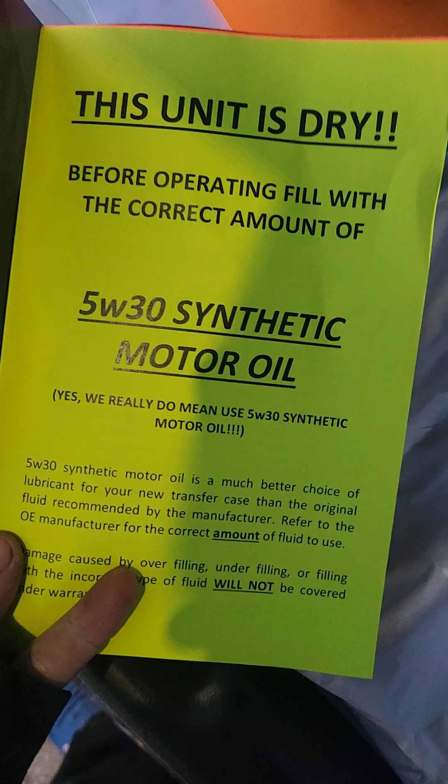This is what caught me off guard. It's probably some specialty things, but I will definitely respect the remarks of that. Brand new rebuilt unit, I don't know how many miles are on it, but I have a brand new gasket for it, so I'm pretty excited there. But that's really all I got to say about that.

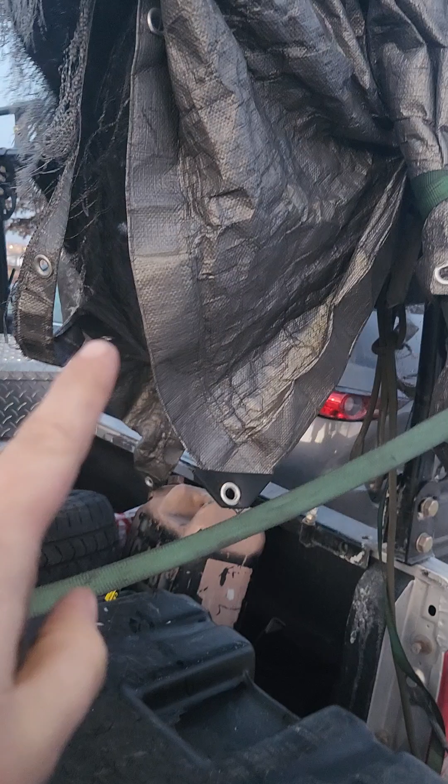As for the mini bike, well she's certainly seen better days, currently rotting away. Currently working on getting the new tires for it sorted, which I have gotten moderately done up. I also picked up a power drill because I know all the gas and any remaining gas in this thing is no good. So I'm gonna go get that situated real quick, and I'll take you upstairs.

Anyways, we're back up to my room right now, and this is what I currently have as of right now. Apologies, I'm a little out of breath right now.

So if you can't tell just by this alone, this is not one of the original rims for this bike. Here are my two. The reason why is, turns out that modding one of these spokes, put it simply, they're the wrong size. So this is going to be my front tire for the time being, which I will just slap a brake disc on it and call it a day.

However, I now have the new project to figure out, which is this one. This will be the powered one, which I was able to retain the original spokes, the original wheel. I currently have a set of titanium spokes that I got from JR Bicycles, which I have stuffed in my Reese Racing sprocket right here that I also can't use because I bought the wrong one.

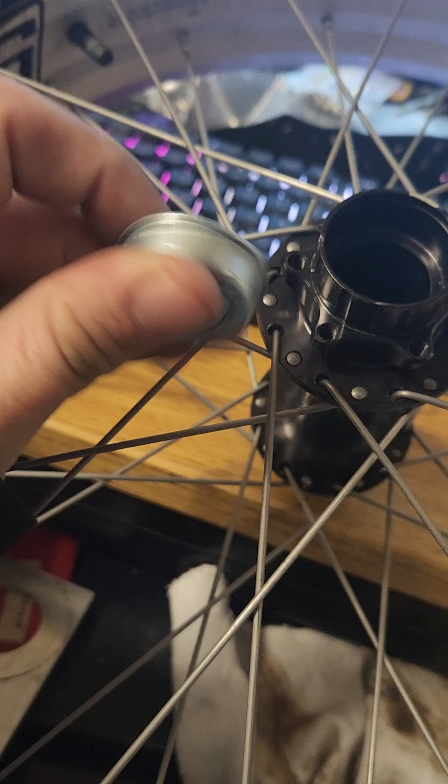I currently have the bearings removed on it because, well, I bought the wrong ones unfortunately, as these measured but they're a little too loosely fitting, albeit the other reason is they don't fit the freaking axle, because I'm going to try and reuse that axle so I'm not having to spend a couple bucks. But it is a pretty loose fit, so I might be able to get away with running a shim, a slightly oversized shim, or just get a length of pipe that is slightly bigger and jam it in there, then throw some bolts and washers to make sure the thing keeps its spacing.

But as of right now, I currently also have, that is a mouthful, a part currently being fabbed up by a company called, I don't know how you exactly pronounce it, I think it's like Xometry or something. Let me just double check real quick.

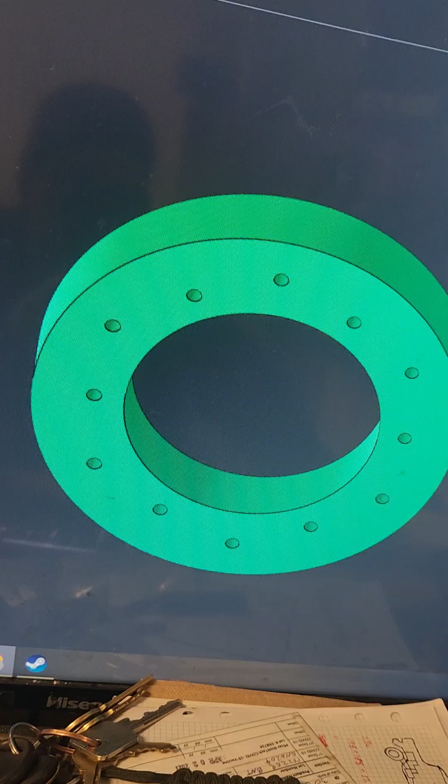Let me take a quick pause real quick. That is the part I'm currently making right now. This is essentially a hub adapter that I'm currently making. I'm currently using Text to CAD to kind of visualize my idea, but to put it into perspective, this is what I have on paper that I've made.

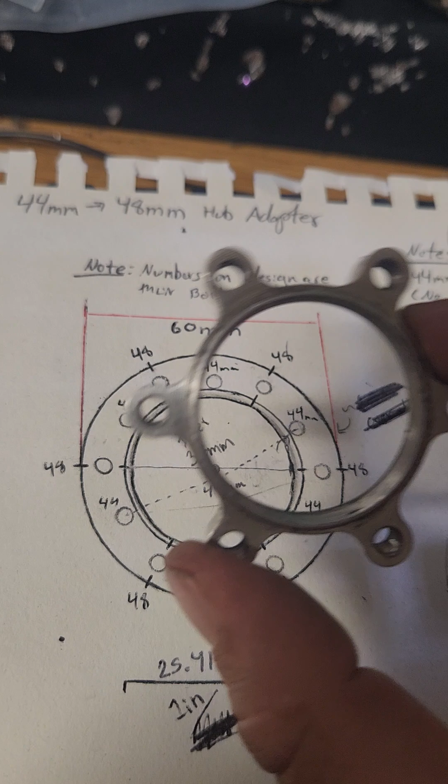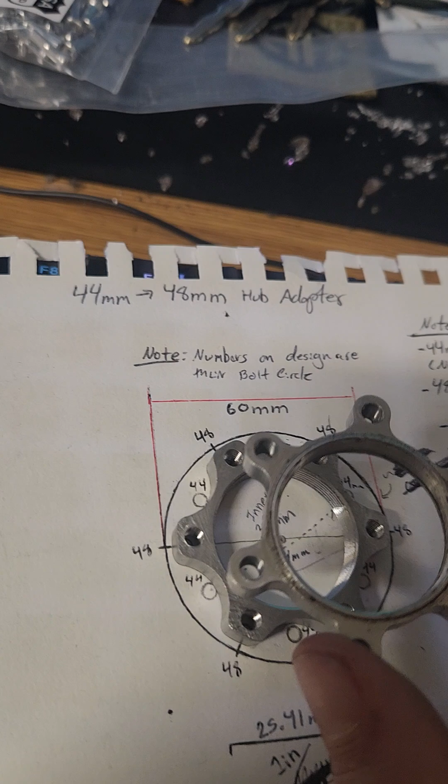So, which takes the standard sprocket for a standard bike sprocket flange. This is meant for a larger set of brake discs for a bike. It's to fit this hub pattern, which is for a standard bike brake disc, to a go-kart race driving sprocket.

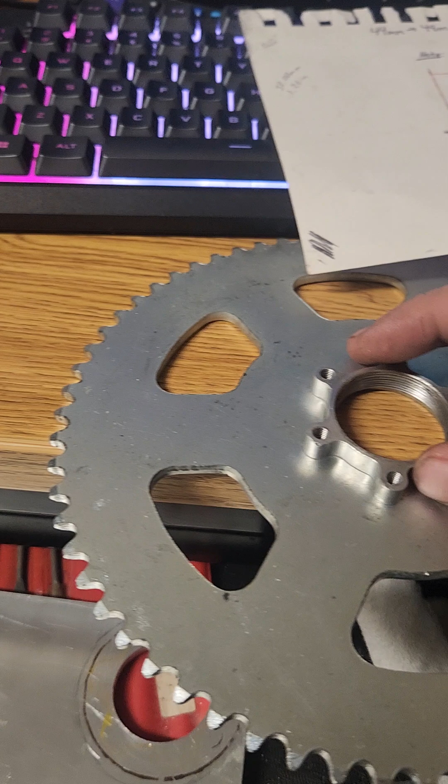If I have the part in question, so I got my bike sprocket. This is for a Coleman CC100X. However, it uses the same flange pattern as most other standard mini bike hubs. So, this is the right size for that.

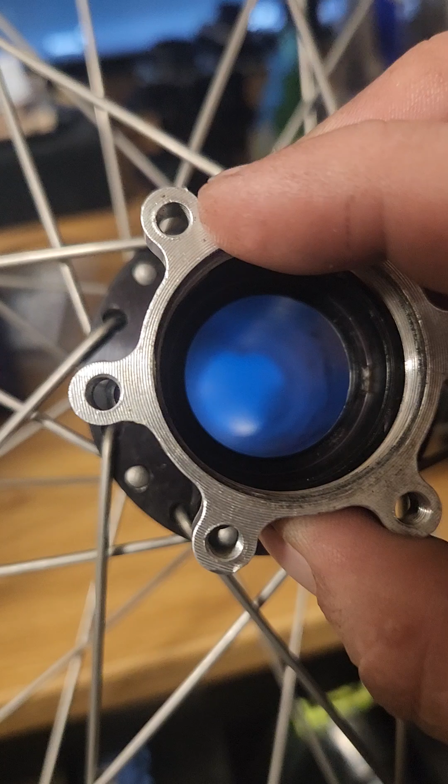However, this is a little too... I can't really use this hub pattern because it does not fit, and the pattern on here, it's essentially too big. Because if I were to just line the hole up, the holes don't match up.

However, with the standard brake disc pattern, if I can grab it, almost every single one of them lines up. So, what I plan to do is take it's essentially like a wheel adapter in a ways.

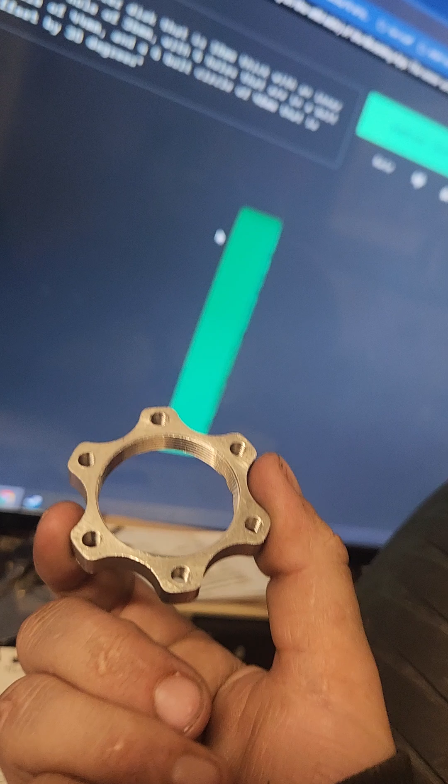You have the one side that has the bike end side of the flange, which then converts to this other one, and I take this idea, put it on the paper, which, by the way, I will show you how to do this.

Also, the other reason why I'm making this part is, let me find this part real quick. If the listing loads, that is the only other company that I found that has it, which is a 48 to 44 millimeter adapter, which is what I based this design off of, because, well, I'm not spending $100.

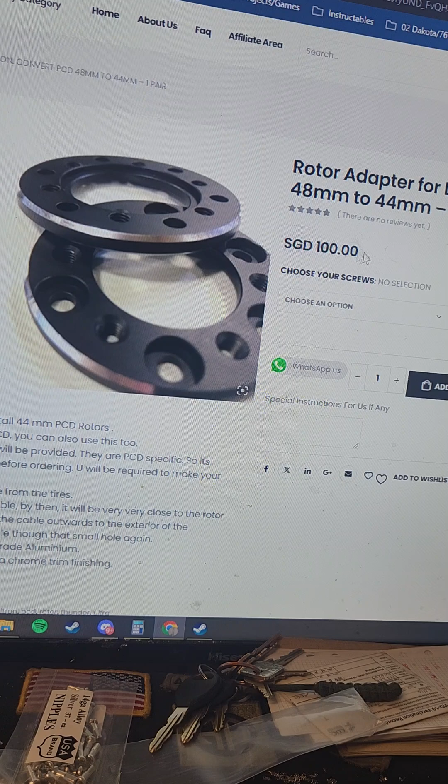I don't remember the exact adapter, or the exact conversion rate, but it's about $70 US, but they don't ship it through. I can't use USPS due to just some issues.

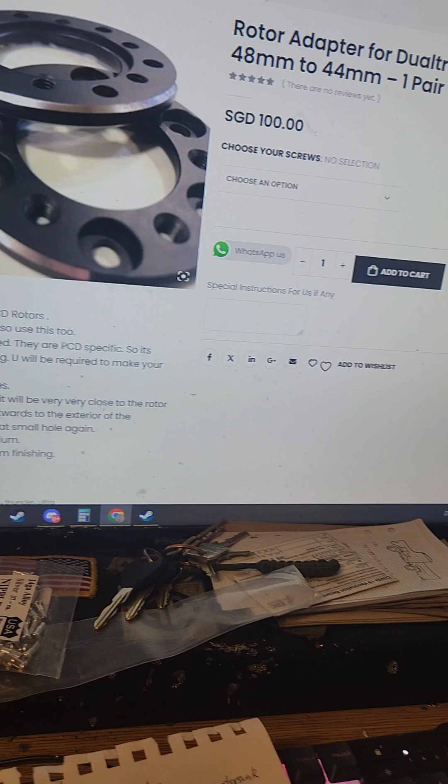And I've put it through this machine, or this company called Xometry, I think that's how you refer to it. They're a pretty interesting company, at least. I mean, it's all China crap, but...

Sorry about that, I had a bit of a stutter, but it's a little bit cheaper. I ordered 2 of them due to the fact I'm gonna try, and I have to make a disc for the back as well, so that's how much both of these cost.

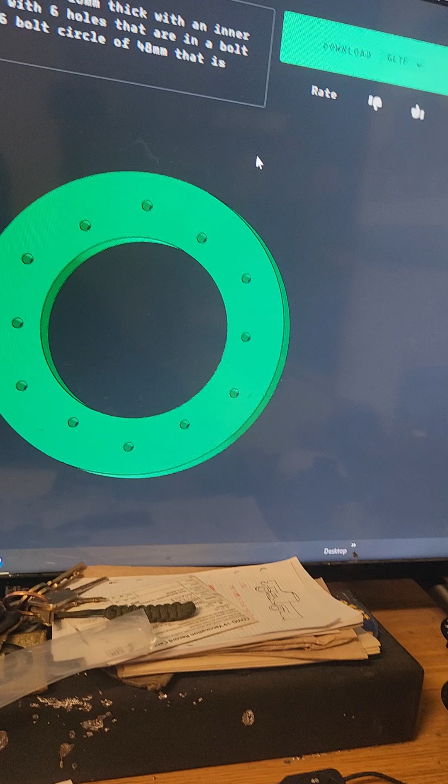And overall, this piece in general, I have it set just for some little basic holes, I think 5mm holes, so that I can drill and tap for what I want, and also so I can countersink them, because this thing is a pain in the butt to code to countersink.

Yes, this is indeed AI. However, for example, let's go...

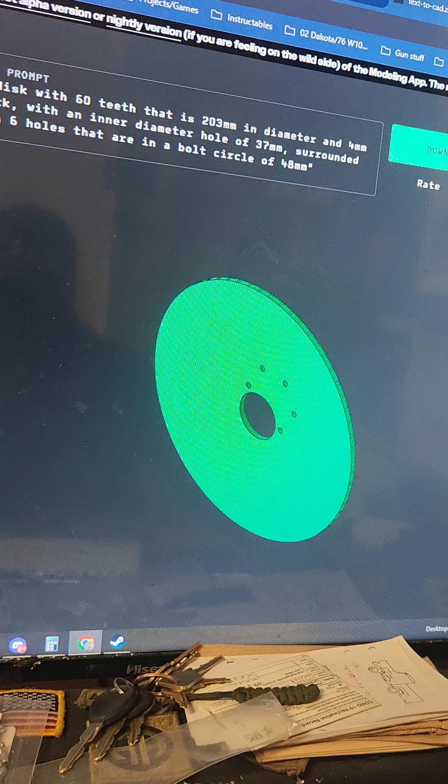If you saw the other item on here, I was making a brake disc. Let me find it, where was it? 200mm disc. There we go. Well, no, wrong one. Not that one, definitely not that one, very much not that one.

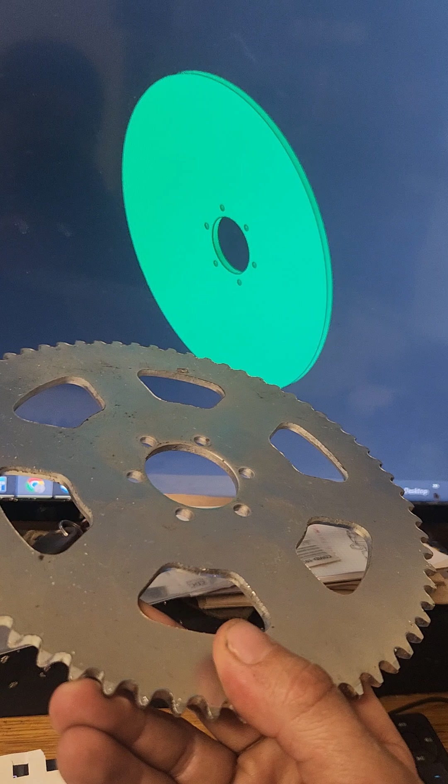There we go. So, this was also my attempt at making a brake disc, which is about - I'm going off the specs of this, essentially, which is essentially a 1-for-1 copy of that, with, albeit, some slightly smaller holes.

I like this a lot, because you're able to convert it to a step file, which is the main file that you're able to convert it to, which is this. So I'm very happy about that.

And there is the brake disc in general. Just to make one of these is about $200, albeit this is just for a machined part, if I recall. Oh, this is 3D printing, that's why.

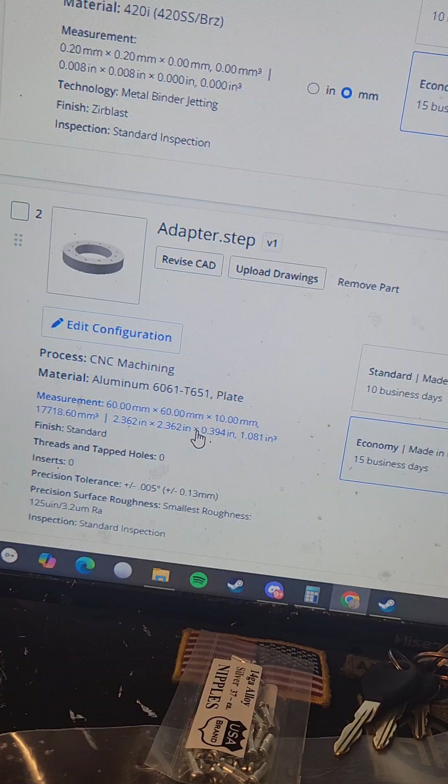I will also say, though, it has some parameters, of course, but everything seems to be going out exactly how it is. I should be getting said part approximately next week, which will be about the 18th, hopefully. But in general, this will be a pretty cool thing to see how that goes, because I've never done something like this before. So I hope this might be something y'all might be interested in.